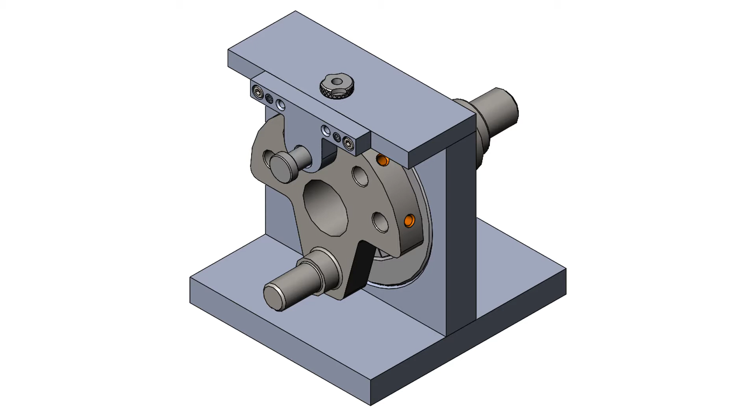The next step we should consider taking in the design of our fixture is examining our indexing pin. First, we should consider the pin and the part hole at their LMC, least material condition. The smallest the pin can be is 0.4997 and the largest the hole can be is 0.5007, which means there's a 1/1000 difference in diameter or a possible radial gap, if everything is perfectly on center, of 1/2 thou.

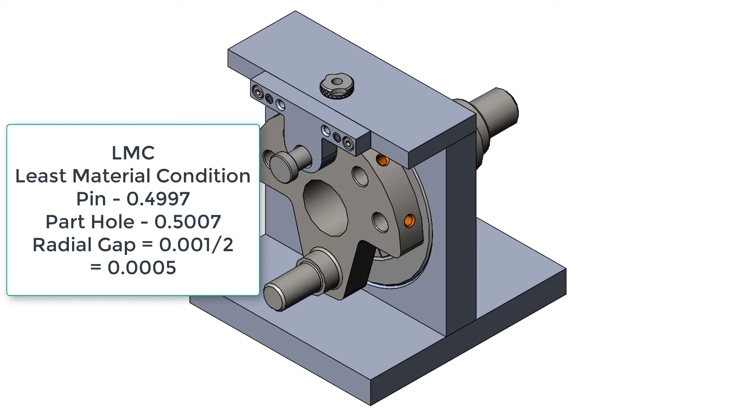Since we already know that this is well within the acceptable tolerance, we can go ahead and start examining the pin for its function. If it were not, we would have to consider making a pin that would always self-center, so the pin would very likely be tapered. Upon examining the pin, one of the first things we tend to notice is there's a small 25 thou chamfer on the front. This is the first thing to enter the hole. A larger chamfer here would make an easier transition. So I'm going to double that to 50 thou.

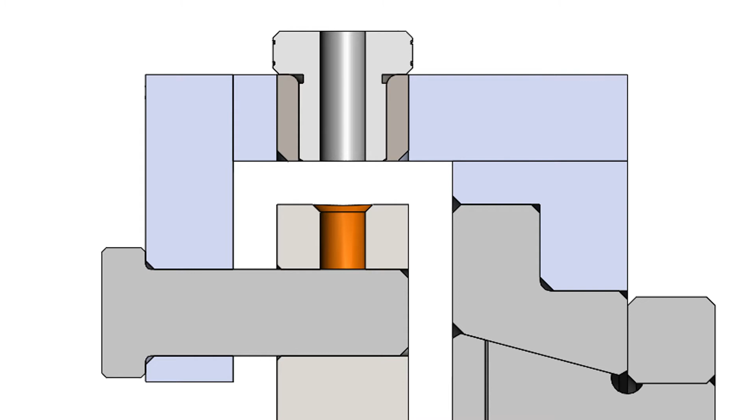Next, if we look at this section view of the assembly, several things should pop out right away. The first one being, there's no clearance in the pin for the drill, and the pin will be hardened. Bringing the drill down into a hardened pin, that's typically bad. And once we add clearance to our pin, how do we keep it oriented so the drill always comes down into the clearance and not into the hardened pin material?

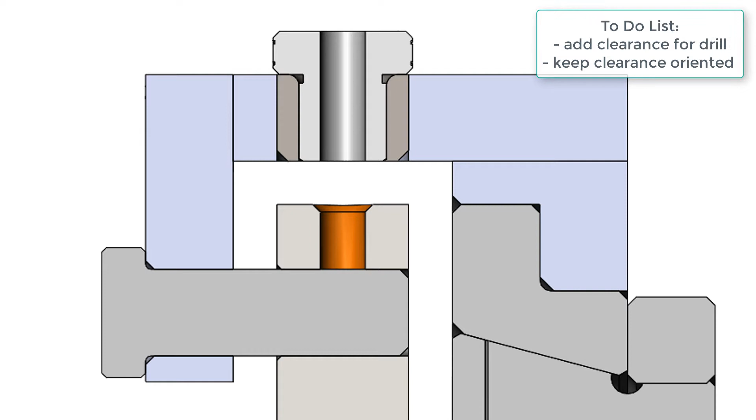Another issue is when the pin's retracted out of the part, what keeps it with the jig? It would be better if it wasn't lost or dropped under a machine or table. And if the pin is going to stay with the jig while we're loading and unloading the part, how do we ensure it stays out of the way?

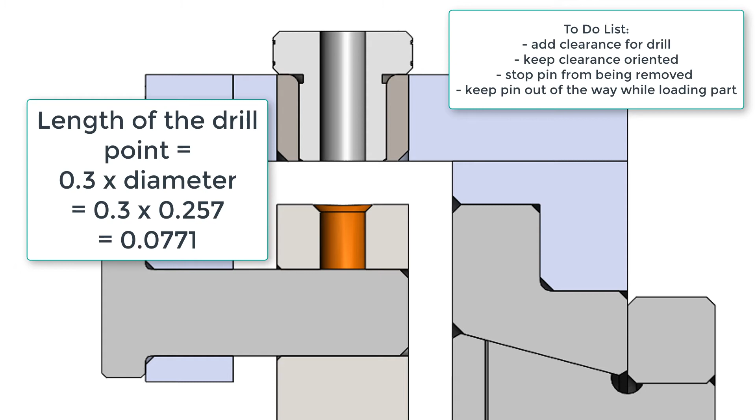First, let's figure out how to add clearance for the drill. The clearance hole will need to be a larger diameter than the drill diameter of 0.257. We also have to think about how deep we take the clearance. Well, the length of the drill point is 0.3 times its diameter, so we have to make sure we go more than 0.0771 deep. To ensure the drill doesn't hit the pin, I'm going to add a 100 thou deep cut, 0.625 from the end, as shown here.

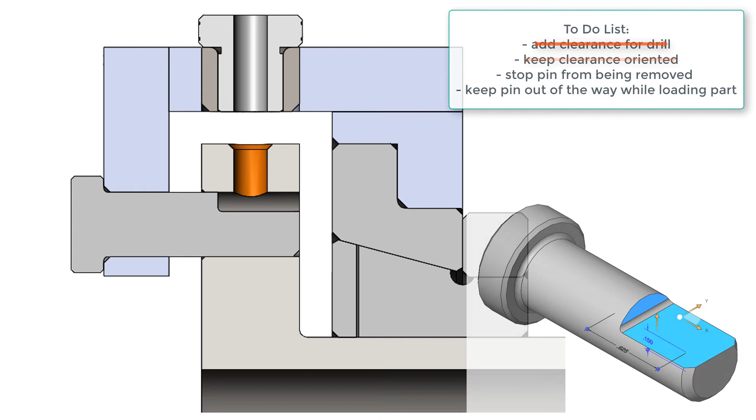I'll also be certain to add a standard fillet size, in this case 1/32, so that there's no square corner to crack during the heat treatment process. Next, I need to ensure the pin is always in this orientation so the drill never hits it. To ensure the proper orientation of the pin, a small flat would be added to the opposite side as shown here, and then a set screw to maintain the orientation.

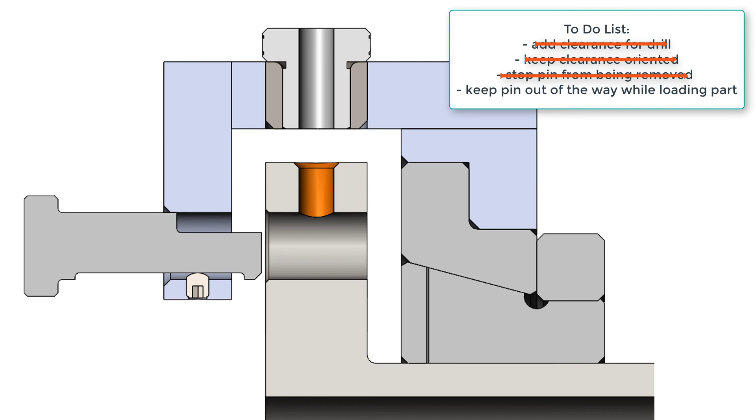Next, a solution needs to be found to prevent the pin from being removed during loading and unloading of the part, so it cannot be lost. To solve this problem, the flat on the bottom is altered so that the pin cannot be removed unless the set screw has been removed first. Next, a method needs to be found to keep the pin out of the way while loading and unloading of the part.

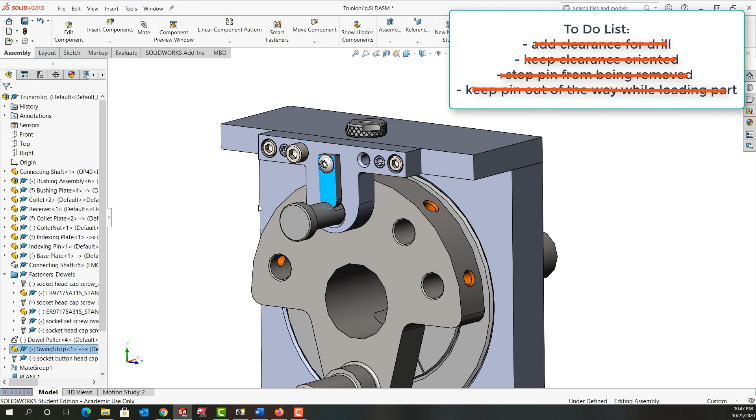To ensure the pin stays out of the way when loading, a simple part such as this could be added, which rotates around a set screw. When out of the way, it could lean against this screw here, and when needed, it could be rotated down into place to prevent the pin from being pushed into the part.

The solution shown here is just one of many possibilities. Another common solution is to add a spring around the pin, and the pin would need to be held in place until the part is tightened, and then as soon as the pin is released, it's retracted out of the way.